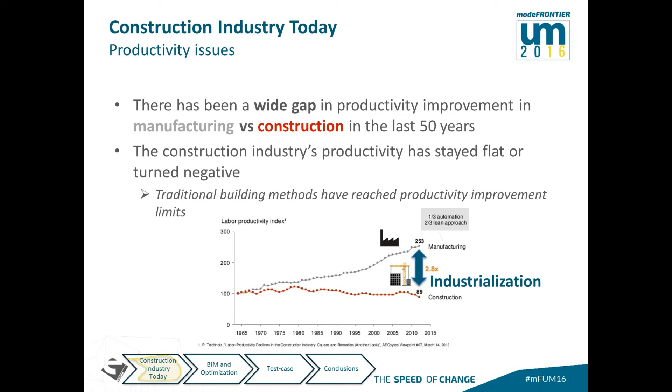So the construction industry needs to industrialize. The main challenges that it is facing today is to improve productivity, quality and sustainability, and reduce cost and waste.

If we look at the design process, it is characterized by the fact that it is interdisciplinary. This is due to the fact that independent specialists come together to collaborate on a specific project, and it is also characterized by heavy architectural constraints, for example space and form.

At the same time, it is ineffective and fragmented. It is characterized by numerous iterations and revisions, poor productivity, high risk, low profitability. This results in projects that are often over budget and behind schedule.

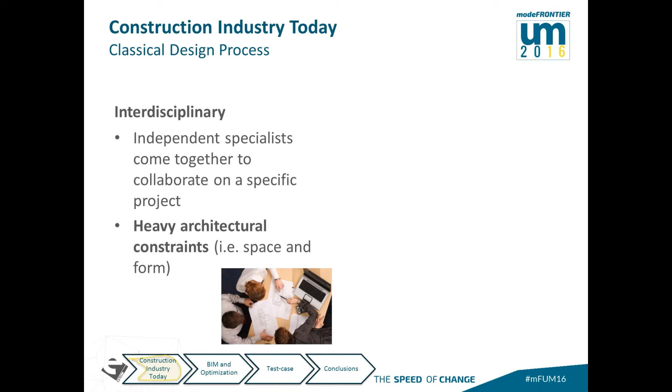If we look at collaboration, we see that it works quite good within each team, while there is a total lack of collaboration in between teams.

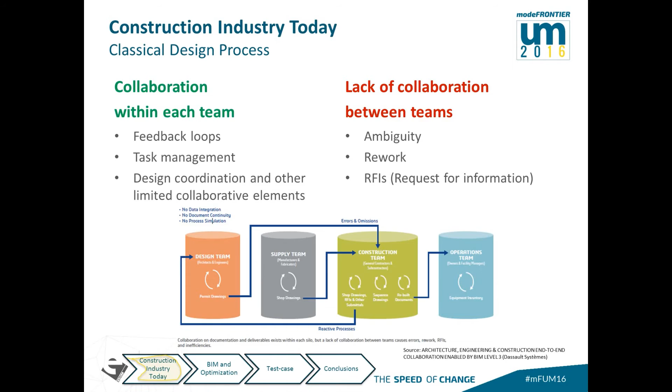The approach is usually manual, iterative, and trial and error. This implies long time for modeling and method customization, and it's a prohibitive practice.

At the same time, design is based on rule of thumbs, and decisions taken are often based on previous experiences or intuition, but do not have a rigorous justification.

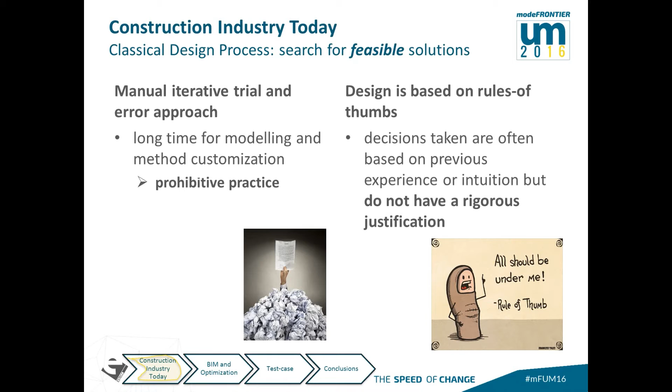So the construction industry is moving toward industrialization and standardization, and two are the main ways. One is modularization and off-site prefabrication, which is known as prefab, and the other one is information technology improvements.

Basically, the design information needs to be structured appropriately for downstream application. And in this field, the solution has been identified into BIM.

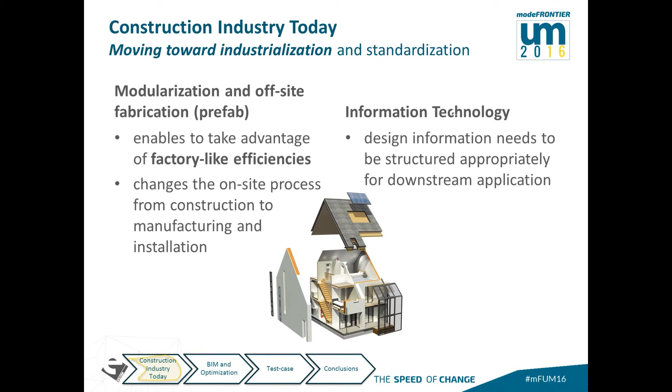BIM stands for Building Information Modeling and consists in methods and tools to integrate, simplify, rationalize, and economize the entire design process. BIM improves the flow of data through the building process and with current and future partners, starting from product concept and down to owner operators.

BIM provides a collaboration-based project backbone that enables centralized project and data management and the right information to be available to the right people at the right time. So basically, BIM is CAD for the construction industry.

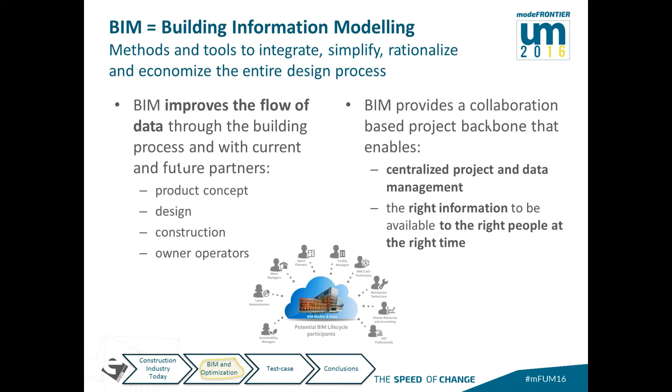If we look at the development of BIM and how it has changed in the past years, we see that the BIM approach started into the 1990s, and we are now here, where we can find transactable and interoperable data. This means that now BIM is ready for multi-objective automatic optimization.

Currently, digital techniques that support the civil construction industry are being adopted most heavily in the United States, but the wave is starting in Europe and emerging countries like China.

However, if we look at BIM and optimization together, we still see some main practical concerns which are related to optimization. Basically, there is a lack in theoretical and technical expertise, and many commercial tools seem to be targeted to the aerospace and automotive industry.

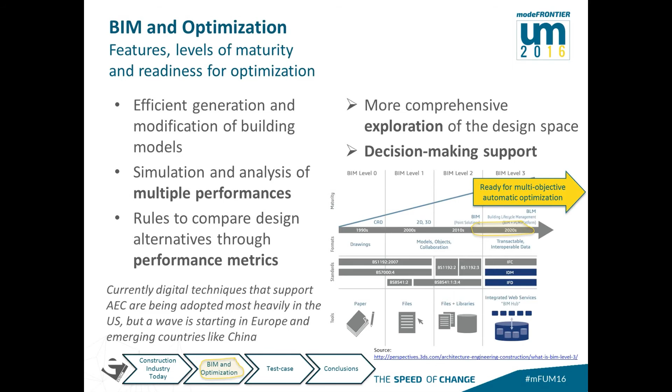and to be inaccessible to designers who do not use them on a regular basis. At the same time, software licenses are often quite expensive.

and the fact that design can change a lot in between revisions results in that optimization effort might become obsolete, so it basically turns into a waste of time.

Now, if we look at cost in the construction industry for integrated design and construction, we basically see that it depends on the total weight of the construction.

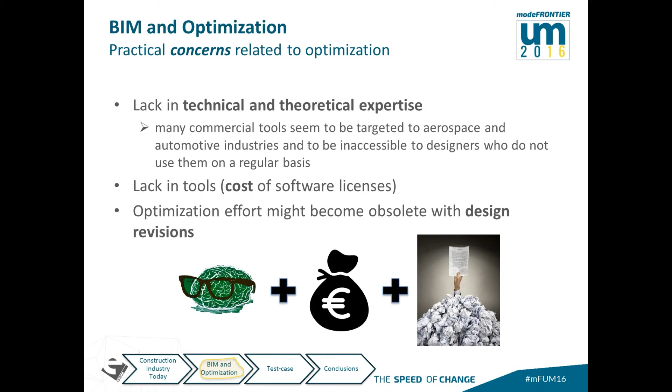If we look at the construction components, we see that they are strongly related to detailed design, so they strongly depend on design services.

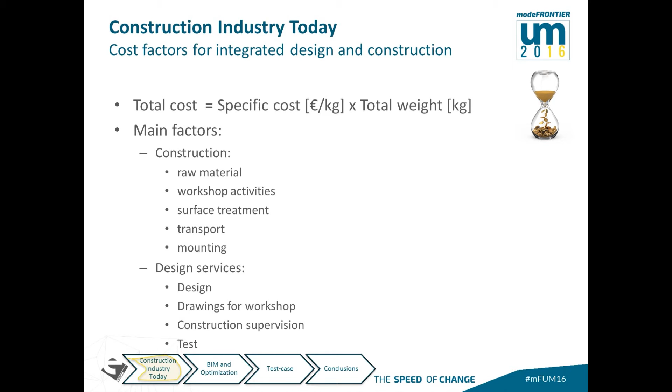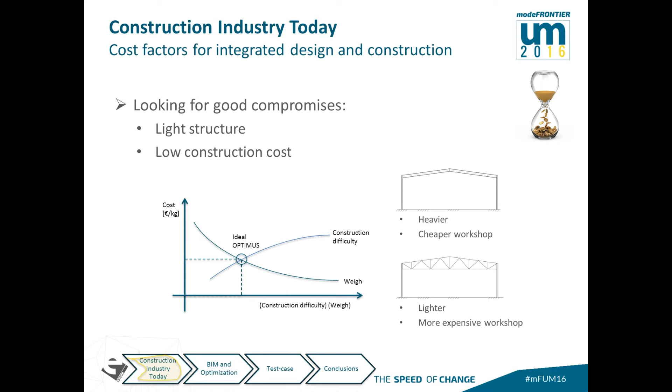So optimization turns out to be looking for good compromises between a light structure and low construction cost. We tried to run this optimization on a real structural case of a steel building. Basically the objective was to see how rapidly we could generate and evaluate a large number of design alternatives to better and faster explore the design space, and we also wanted to see the cost related to structural weight.

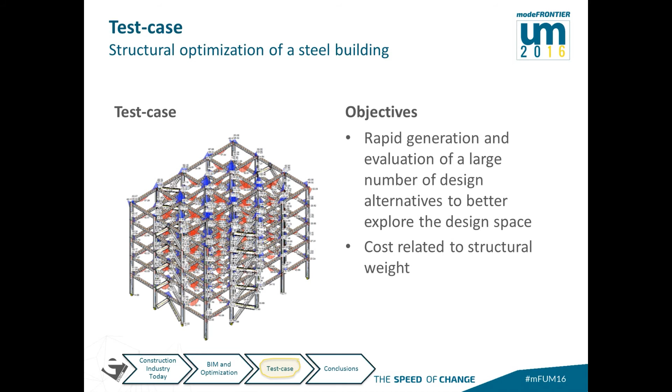The workflow built started from Autodesk Revit, from which we exported the structure, put it into Robot Structural Analysis, connected to modeFrontier, checking stress rate, max displacement and total weight, and using these factors to optimize the performance of the steel building.

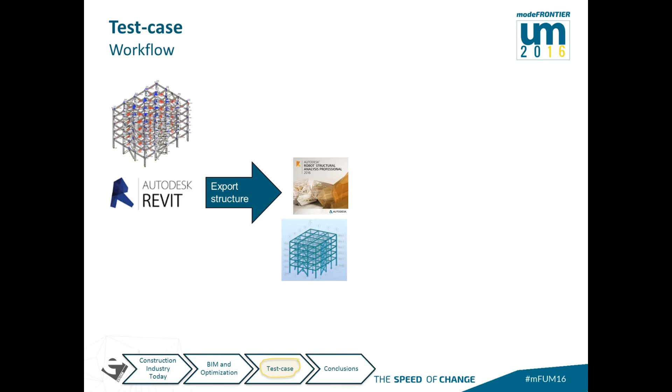Then we tried with different sections for each floor, changing beams and columns from a database of different profiles. Basically the optimization was run between Robot and modeFrontier, and then the final optimal structure was exported again into Autodesk Revit. This is the modeFrontier workflow.

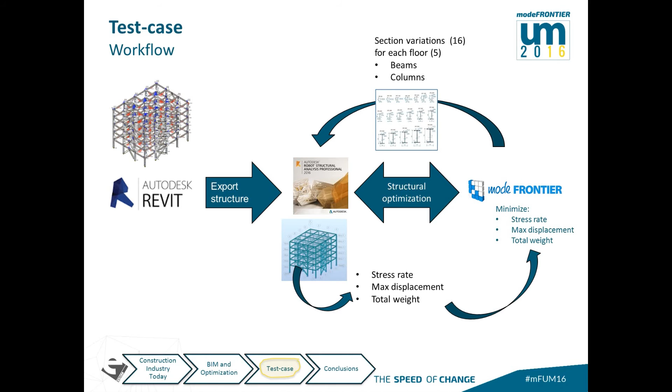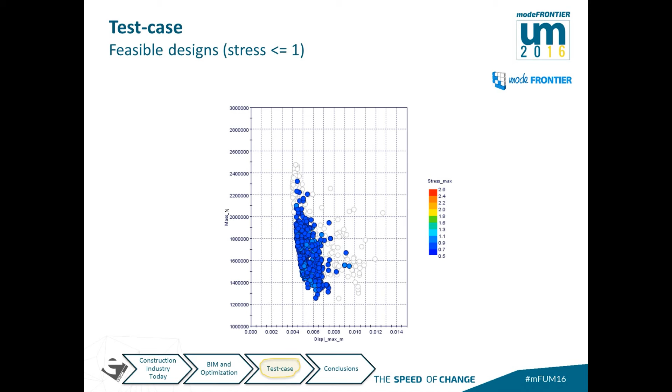Here is where all the designs are reported, and we filter them just for feasible designs, which means that we put a constraint on stress. Then we did some more filtering in order to identify best solutions. We found the one that we chose as optimal, and we compared it to a manual solution.

Now, if we look at the mass of the two configurations, which both pass structural tests regarding load constraints, we see that there is a reduction in mass of 32%.

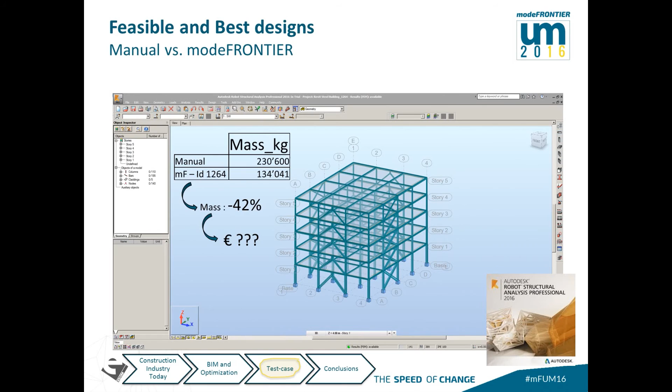But what does it mean in terms of cost? So if we look at how costs are spread between the different design aspects, we see that the actual construction accounts for 87% of the total cost. This means that's the one with the highest impact. And then we look at structural design and drawing for workshop, which is just 8%.

So if we look at the savings, we can see that savings are quite important even for a very simple steel structure like a 5-floor building, which can basically be used as a parking garage.

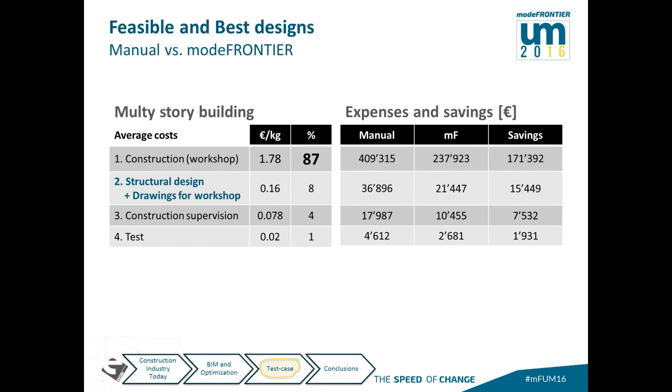So we can conclude saying that the adoption of automated optimization in the building industry is a worthwhile endeavor, even if there are still important issues to be addressed. First of all, the design is paid based on looking at the cost, so there is no push for improving the design and making a lighter structure. Drivers can be seen as financial savings, which are mostly important for the one who has to pay, or in case of a tender, it's important to win the tender.

Regarding this aspect, we can say that a main driver can be seen in better exploration of the design space, especially in the early design stages. In fact, it is possible to discover unexpected feasible solutions within defined constraints, like we did for the test case.

However, there are still some issues that need to be addressed. First of all, companies have to be willing to change their long-standing work process. Moreover, initial investments are needed to develop capabilities before cost benefits are achieved.

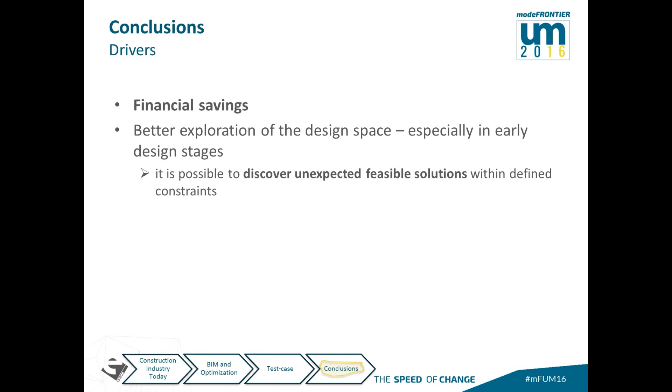So if we look at the scenarios of transition to optimization, we can say that there are two ways to move to optimization: one is faster and one is slower. Faster can be suitable for larger corporations with larger turnover, highly skilled technicians, and high adaptability, which is not the case for most companies in the construction industry. So construction industry can be seen in this case as slower transition for smaller corporations, with a classical design and engineering approach and lower adaptability to complex software and working methods.

So we can say that in this case, optimization can first be offered as a specialized service.

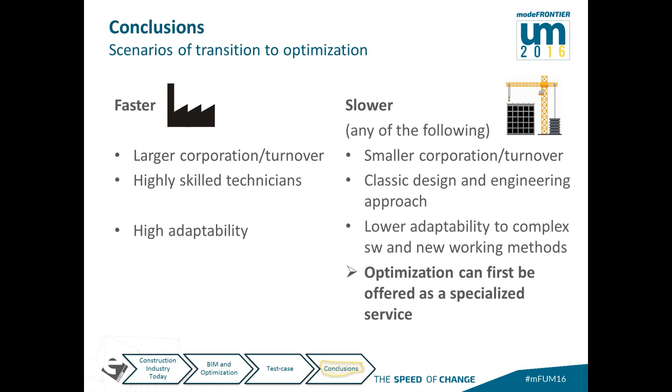In conclusion, we can say that opportunities will rise as this industry is just beginning its journey to support the full life cycle of construction assets using 3D tools, collaborative platforms, and integrated project management. However, an adapted solution must be flexible enough to expand to meet today's and tomorrow's requirements.